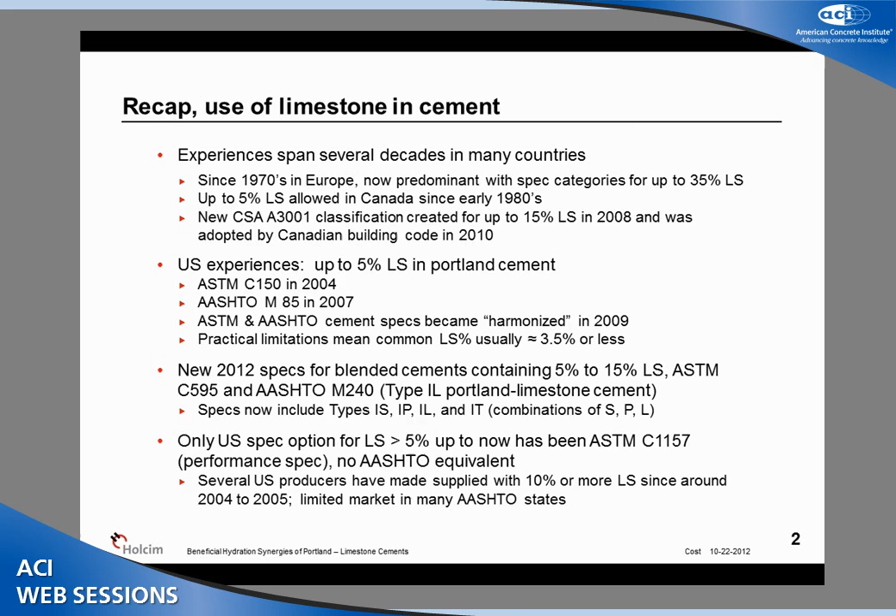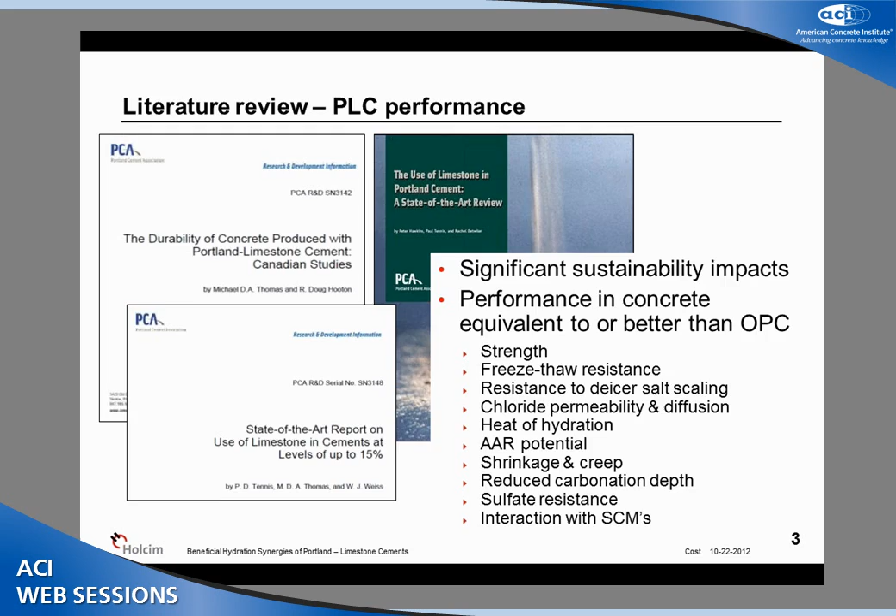As many of the presentations this morning, I'm sure, summarized, there's been quite a bit of literature review from papers published around the world that substantiate the performance of Portland limestone cements as potentially at least equal to ordinary Portland cements in virtually all categories. These are some PCA publications that have done a good job of bringing together much of the literature review on the subject, as well as some new information just recently.

As kind of a basic look at what Portland limestone cement is, this is simply the addition of some ground limestone materials along with clinker and gypsum to the finish grinding mills at a cement plant. Virtually any cement plant can do this.

This does result in grinding this product to a higher overall fineness than ordinary Portland cement, and this does slow production a little bit. But what we find is that the limestone portion of this mixture, since the limestone is not as hard as clinker, is more easily ground, the limestone fraction becomes concentrated in the finer particles of the resulting blend.

And so the relationship of the particle character of the limestone and that of the clinker becomes a little bit complex because we don't have a direct test method for evaluating that in the finished material. A lot of the literature summarizes that as long as we grind the Portland limestone cement to a level somewhere in the neighborhood of about 100 meters square per kilogram higher in Blaine than the comparative ordinary Portland cement, the performance is roughly the same.

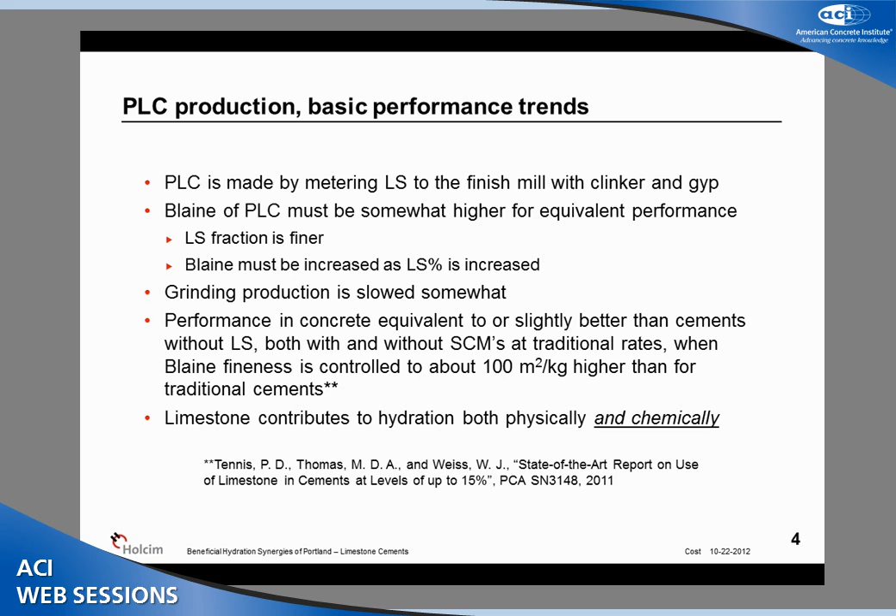One of the interesting things that we find is that the hydration of this material and the synergies that we see are happening both from physical and chemical interactions.

Holcim has supplied over 1 million tons of Portland limestone cements in the last few years under C1157. Many of the other cement companies have similar reports of experiences. We've had quite a bit of success with these products and found their attributes to be much as the literature review suggests.

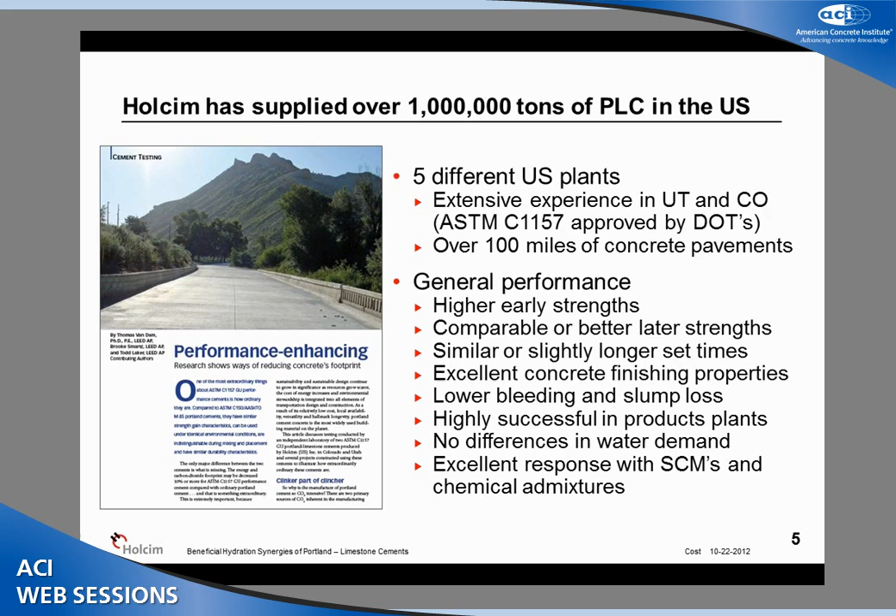Much of the experience has been in the western part of the U.S., where the ASTM C1157 specification has been recognized by some states, and we now have over 100 miles of concrete pavements constructed in the states of Colorado and Utah using this material.

This is just an example of some concrete data from our initial experiences with this material that kind of led us to investigate these synergies. This is 2 different plants represented from 2005, 2006.

What we're seeing, even in plants where the response of the ordinary Portland cement with replacement of Class C fly ash was not very stellar, and that was true for both of these plants, when we took the same clinker and made Portland limestone cement, all of a sudden this trend reversed.

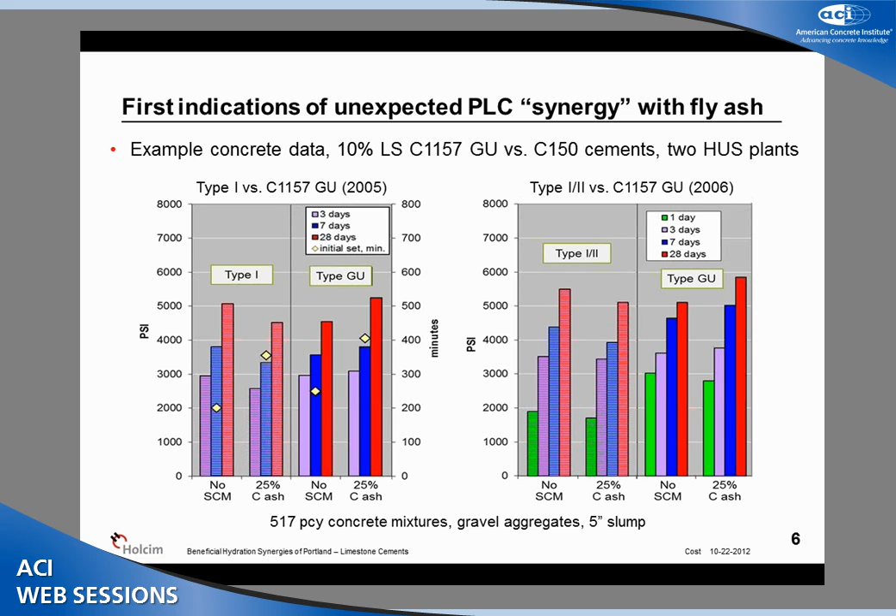We started seeing better behavior, higher strengths at all ages with the same percentage of fly ash replacement. Now, this led us to think that this was something that we should better understand and take advantage of.

When you start doing literature review on such synergies, there are quite a number of papers that have been published by authors all around the world on the subjects. Many of them have investigated primarily the setting time influences.

It's been found that limestone in the system can be a very useful tool in mitigating the otherwise retardation issues that might be associated with, for example, high volume fly ash mixtures.

There are clearly at least 3 different interaction synergies at work that are reported in these papers. These are just a few of the ones that I personally have read. These 3 different mechanisms include 2 that would be in the category of physical phenomenon, that is particle packing and

nucleation site phenomenon. But the third is more of a chemical nature. It's actually the formation of new hydration products, carboaluminates that result from the interaction of calcium carbonate and aluminates in the system.

And this is particularly interesting from a number of viewpoints as you begin to look at systems with SCMs involved, because some of those systems contribute additional aluminates that can combine with the calcium carbonate.

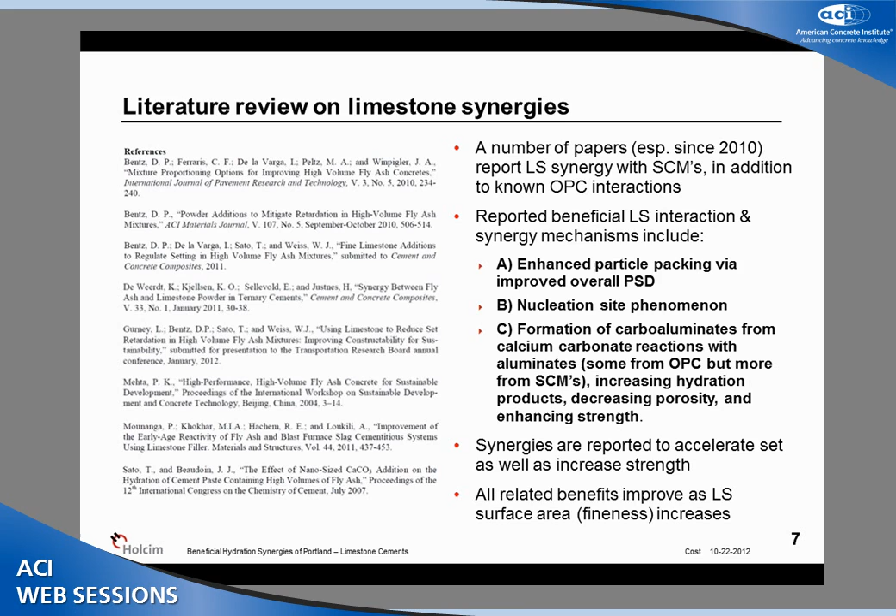Testimony to that is that many of these authors have reported that these synergies and the strength and setting time trends began to improve further as we further increase the available surface area of the limestone.

We conducted some initial experiments with laboratory paste to see if we could better understand this. And since the ability to characterize a ground system as far as the distinctive particle size properties of the

limestone as it differs from the clinker, since that's very difficult to do, we decided to, in the laboratory environment, simulate Portland limestone cement with separate ground limestone additions to ordinary Portland cements.

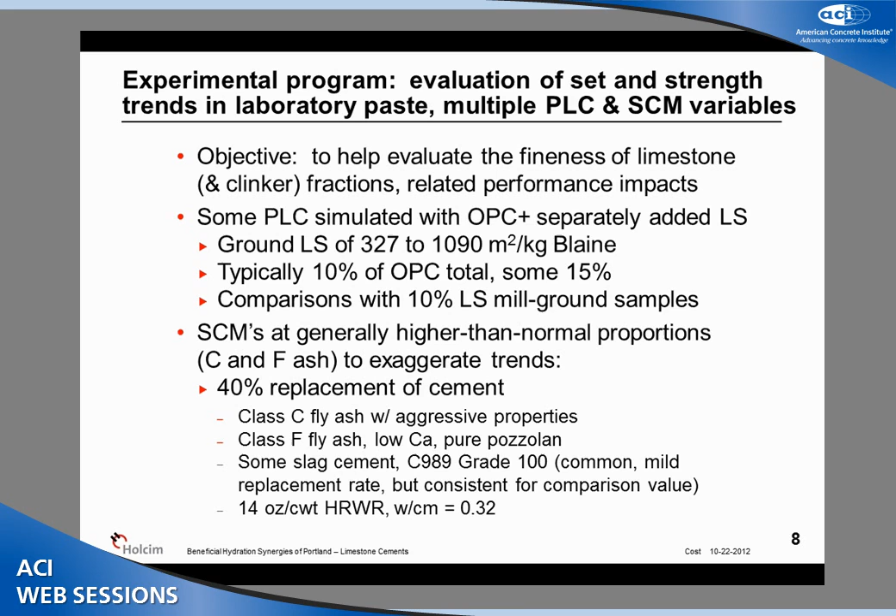And we did this also in comparison to mill ground Portland limestone cements. And we used some SCM replacement rates that were a little bit higher than norm to kind of exaggerate the trends that we were interested in paste mixtures.

Now, these paste mixtures are done primarily because it's a very simple and very rapid way to characterize material performance trends, both with respect to setting and strength.

What we do is we actually batch the paste with a kitchen mixer, mix for about 60 seconds, and fill 2x4 cylinder molds with paste. We can do from 3 to 5 dozen of these mixtures in a 3-hour session.

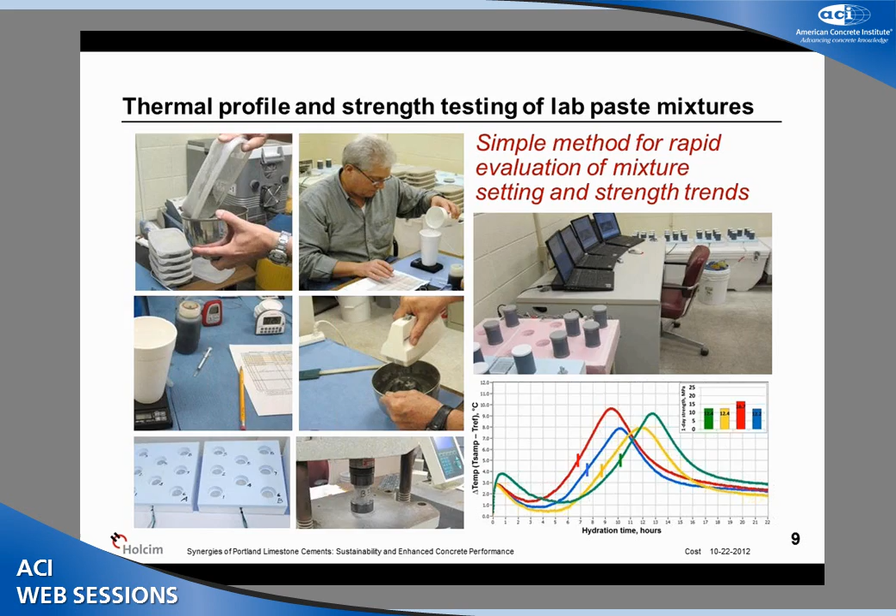And then the next day we come back and look at the thermal profiles to evaluate the setting trends that are occurring, and then we test the 2x4 cylinders in a compression machine for strength trends at the ages of interest.

Using this technique, we began to explore these properties with simulations of Portland limestone cement, and I've got a couple hundred different data points.

I've tried to dumb this down to just a few to show some trends. This is a trend we see with ordinary Portland cement, no SCMs involved, compared with simulations of 10% limestone cement. We varied the fineness of the limestone to better understand the influences, from a fairly coarse limestone, significantly coarser than the cement we're using, to a very fine limestone that we thought was probably in the neighborhood of what the Portland limestone cement system actually was, if you could delineate the limestone. Here's the performance: 1 and 7 day paste strengths.

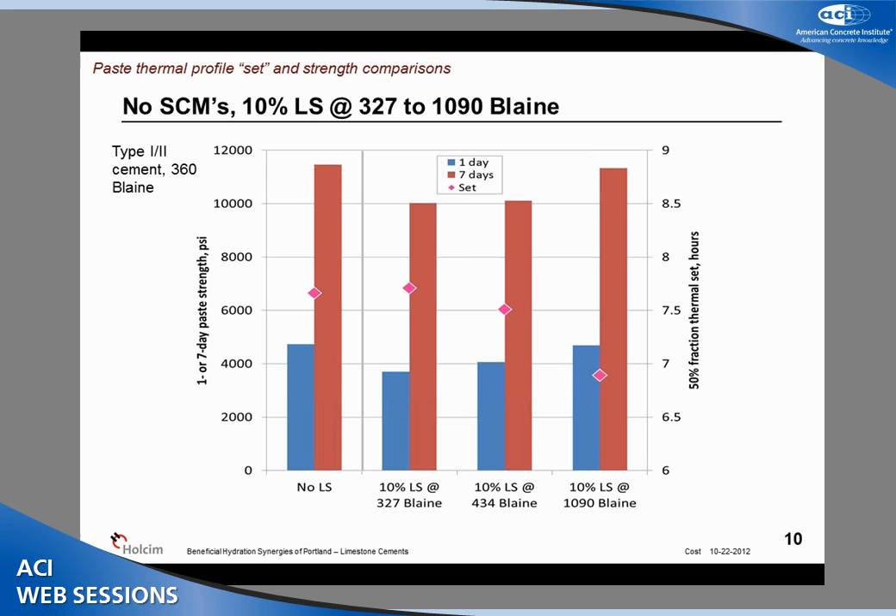I don't have 28-day data for this paste without any limestone replacement of the cement. This is the axis for the thermal setting times we observed, indicated with the diamonds. As you can see, when you go to 10% limestone replacement with the coarse limestone, the strength performance is detracted initially, until you begin to make that limestone finer. At a certain point, you can actually recapture the lost strength from the 10% dilution of Portland cement. The setting times also become quite interesting, becoming faster with the finer limestone. Nothing else has changed in these systems.

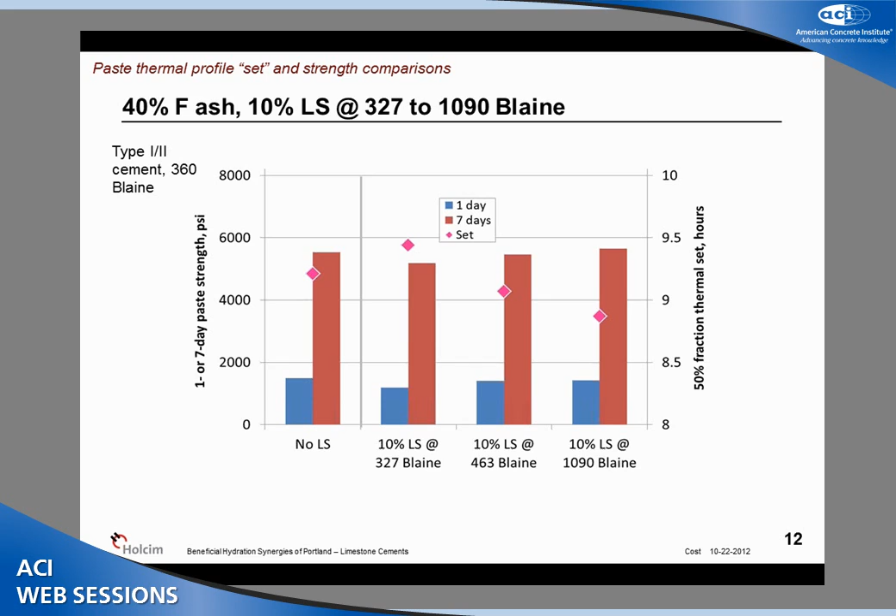Later on, we included some slag cements in different studies, and we were also interested in the effects of not only 10% limestone systems, but up to 15%. Here is a similar simulated mixture with 10% limestone of the finer grind we had played with before, with 40% no SCM, 40% C ash, 40% F ash, and 40% slag. Now, this is without the limestone, this is with the 10% limestone as before, and this is at 15% limestone. You can see that even at 15% limestone, in general we're at least equal to, and in many cases outperforming, the system without limestone included.

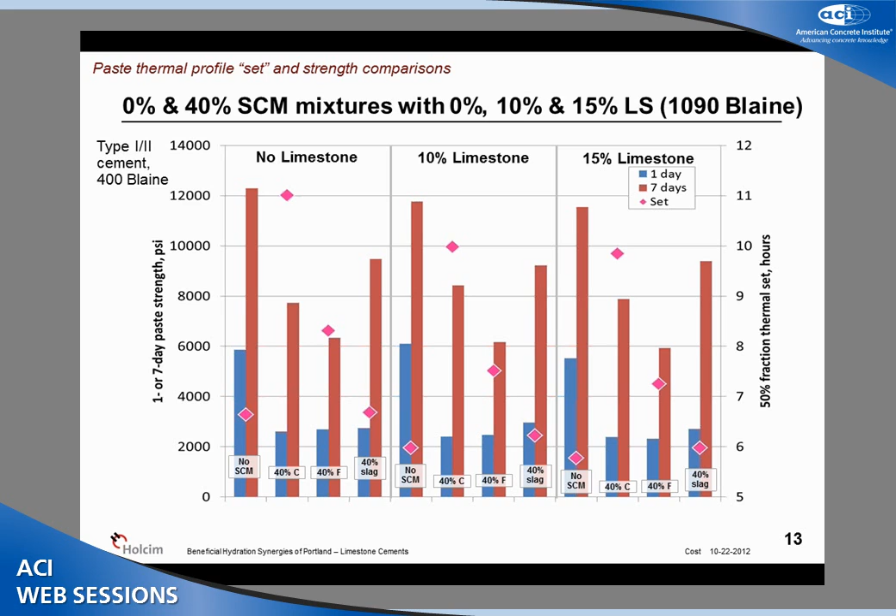Now, what was particularly interesting to me is when we took these sets of mixtures with 10% limestone of the finer grind that we had played with in the laboratory, we repeated this work with those same proportions and compared that to the performance of mill ground Portland limestone cements from our cement plant at the 10% level, theoretically the same material as we were attempting to simulate. The interesting thing is, here's the system of the laboratory separately proportioned paste mixtures.

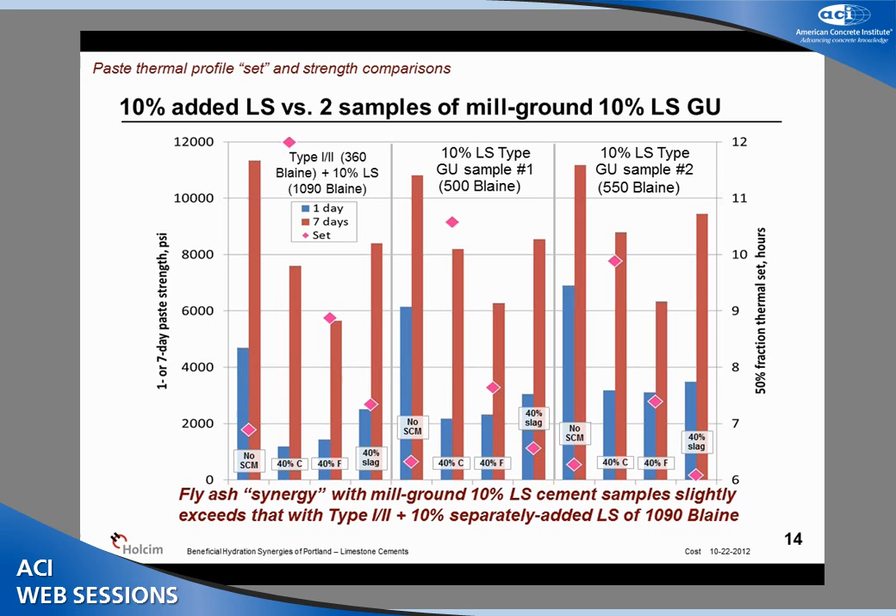Here is a 10% mill ground Portland limestone cement at about 500 meters squared per kilogram Blaine, and here is a slightly finer, about 550 meters squared per kilogram Blaine limestone. Presumably similar clinkers, though not the same clinker sample because the mill ground systems were collected on different days. But you see that the mill ground samples significantly outperformed the laboratory simulation we had been doing before, both in strength and in retardation mitigation. This led us to believe that our initial estimates of the fineness of the limestone fraction were probably not very good, and that it was actually much finer in the real limestone system.

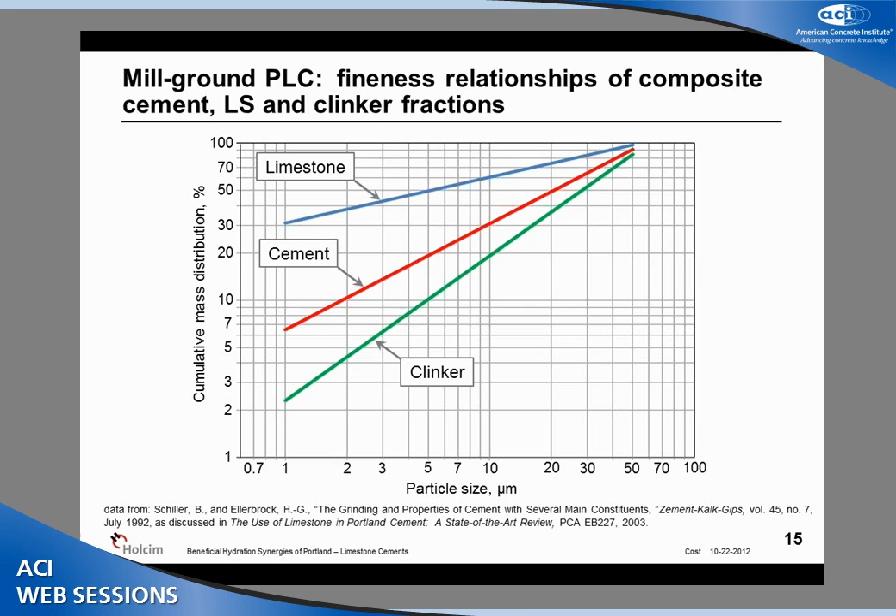When you read the literature on the relative fineness of these materials as they might result from a mill ground system, this is one reference you can find cited in the handout. This graph depicts the cumulative mass distribution of particle sizes for the composite cement in red, the clinker in green, and the limestone in blue. As you get into smaller and smaller particles, they become more and more limestone concentrated.

We took the different materials we'd been using in the laboratory, both the separately proportioned materials and the Portland limestone cement ground in the mill, and did a particle size distribution analysis. We proportioned in an Excel spreadsheet what they would be for the separate components we had batched in the laboratory. The ordinary Portland cement is in blue.

This is about 76 microns, and this is about half a micron, to give you an idea of where you are on the chart. The blue is ordinary Portland cement, the red is the resulting combination of 90% Portland cement and 10% ground limestone, and the green is the actual mill ground system at 500 meters square per kilogram. So you can see that we were indeed missing the concentration of very fine particles that are much more prevalent in the mill ground system.

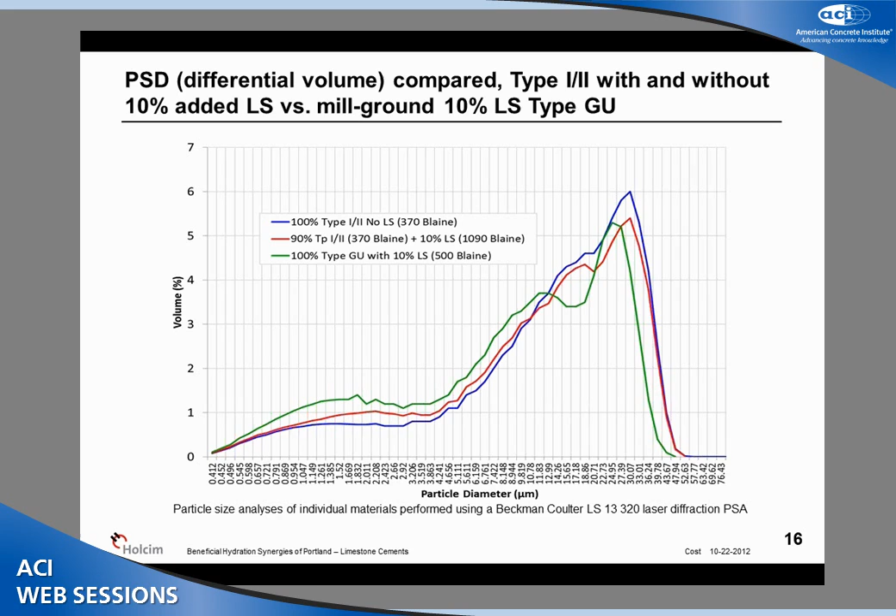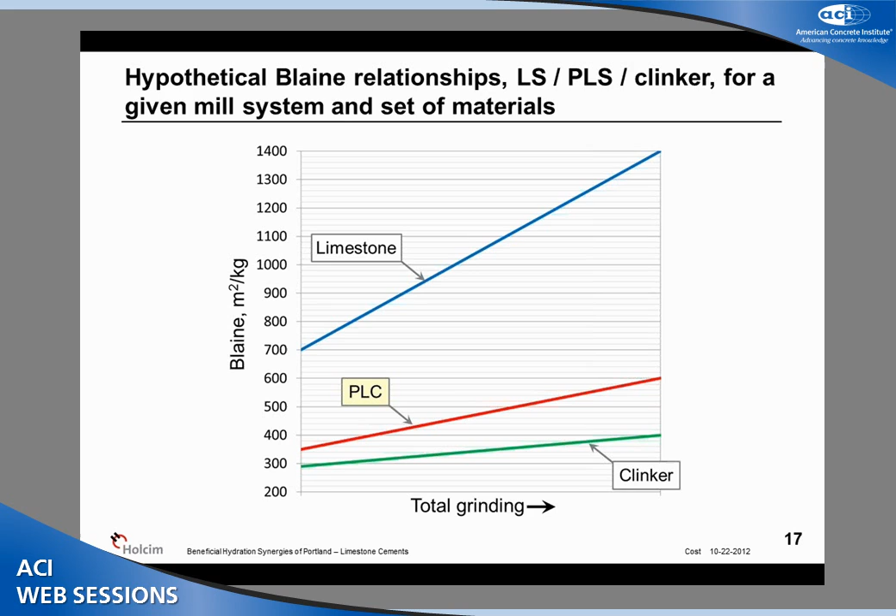So what does this mean in the grand scheme? We think this is kind of a shoot-from-the-hip depiction of what's going on as we increase the grinding time in the mill. This is kind of an educated guess.

We've not been able to come up with a good test method for evaluating the different proportions of the finished product. But if this is roughly true, here would be a couple of examples about the fineness of the different component materials of the Portland limestone cement.

As the Blaine of the PLC increases, the Blaine of the clinker is increasing very slowly, but the Blaine of the limestone is increasing much more rapidly.

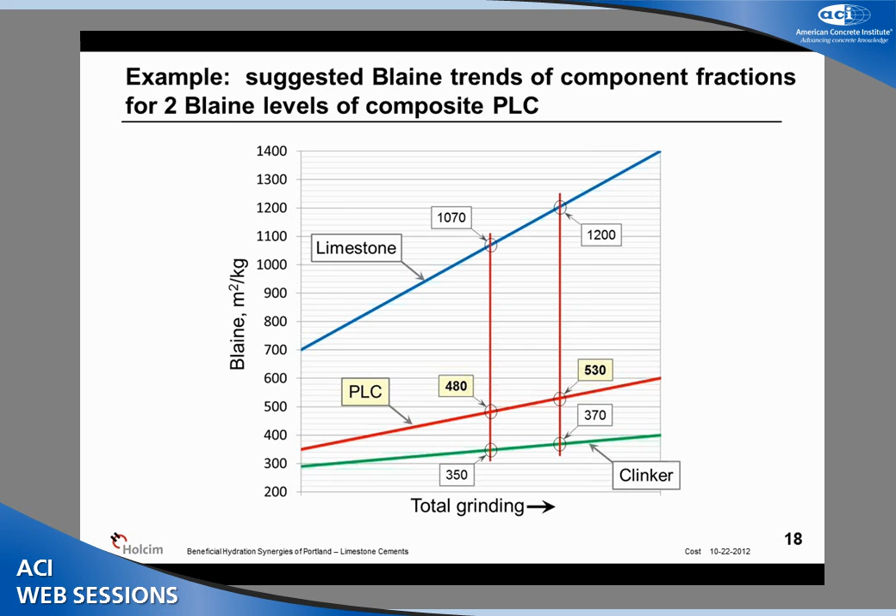Here would be an example of about 100 meters square per kilogram higher than the ordinary Portland cement Blaine. If you only go up another 50 points, the additional limestone fineness is significant, but the additional clinker fineness—we're probably not even back to the original OPC fineness of the clinker particles yet. That's our premise anyway, that's where we think we are with this.

So in conclusion, most of these conclusions are fairly obvious, so I won't read them to you. This is available on the website if you'd like to take a look. We're doing additional research, trying to better understand these relationships and better characterize the material in a Portland limestone cement that's been ground in a finish mill.

One stumbling block for us in the industry as we try to do education and promote this material, particularly with DOTs, is that because of the specification category for Portland limestone cements under the new blended cement spec, many DOTs will consider that when you add a fly ash, slag cement, or silica fume to this system, you now have what they refer to as a ternary system, because the limestone is considered part of the cementitious components as a blended cement. Ternary systems may not be allowed in their specifications. So now we have a caveat to work through.

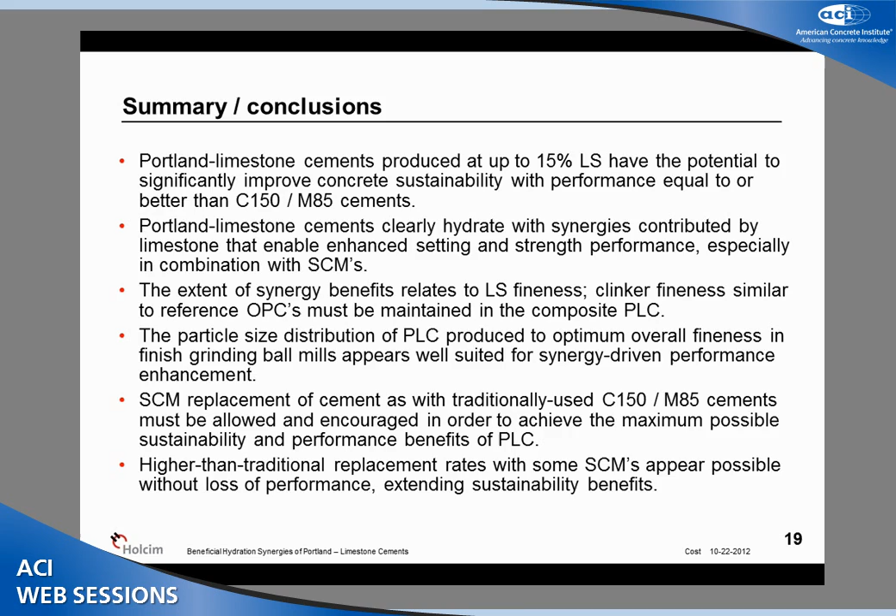If we're going to derive the benefits from this synergy, we must be able to use supplementary cementitious materials with Portland limestone cements, just as we would with ordinary Portland cements. It might also be possible, as this work begins to suggest, that we might further enhance sustainability, not just from the limestone component of the cement itself, but maybe even by increasing the replacement rate of supplementary cementitious materials. So that's where we are.

We'll continue to work on this. There's other research beginning by other researchers and universities as we speak that hopes to develop additional information, including things we might be able to do to cement chemistry to better capture these synergies of hydration. I thank you for your attention.